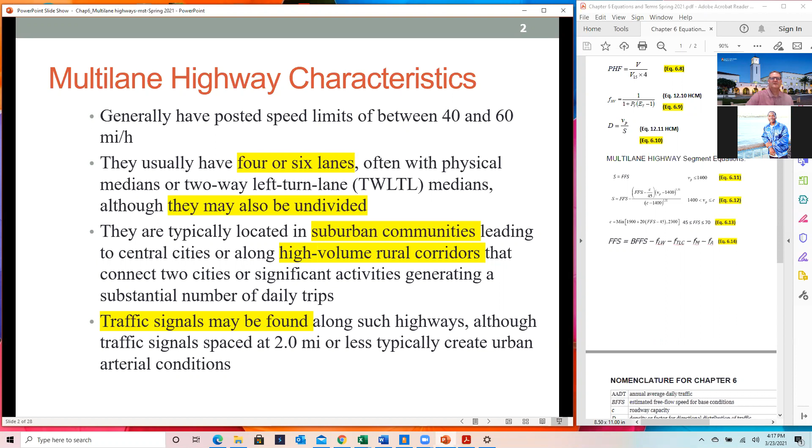Okay, what things make multi-lane highways different from freeways. First and foremost, vehicles enter and leave at intersections and driveways, and they can go through the median. You can't do any of that on a freeway - there's no intersections, there's no driveways. I mentioned that last week, that maybe the only kind of driveway you would have is to some sort of maintenance station or something. But multi-lane highways, definitely you can enter them from intersections and driveways, and you can go through the median at various points.

Traffic signals can be on the facility. Remember, on freeways, the signals are only at the ramps, where the ramps tie into the local road, but they're not out on the freeway itself. And the design standards of multi-lane highways tends to be lower than what you find on freeways. But as it says, the ideal multi-lane highway approaches freeway conditions as you have fewer access points and less turning and less friction, let's say, to the traffic flow.

The visual setting and developed frontage along multi-lane highways have more impact on drivers. Think about Friars Road, there's shopping centers right up against the road as you're going in and out. So there's a lot of what I call friction in the traffic. You've got to be very aware as a driver of all the interactions, vehicles coming and going, making turns, coming in and out of driveways. You don't have any of that on freeways. The only places you have that kind of friction on freeways is in those weaving areas we talked about last week.

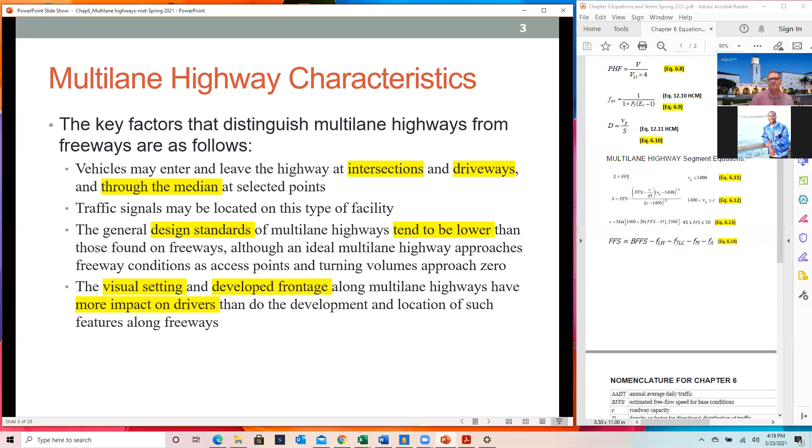Here's a few equations, and when you look at them they'll remind you a little bit of the equations we worked on for freeways. But the break point, that's the one thing in the freeway equations, there was a BP, the break point, and there was an equation for it. When it comes to multi-lane highways, the break point is singular, it's 1,400 passenger cars per hour per lane. So the break point is the same for all speeds on a multi-lane highway. For freeways, the break point was different for different speeds, and if you look closely at the figures you'll see the difference.

So there's still a capacity calculation, a C calculation, that's equation 6.13 for multi-lane highways, but there's no break point equation for multi-lane highways because the break point is 1,400 in all cases. You can see this equation looks similar to equation 6.2 for freeways. As a matter of fact, I've got 6.2 listed up here - you can see the freeway equation. It's similar, but it's got break point, BP, in the equation rather than, here it's 1,400. And the power that it's raised to is different than the power here.

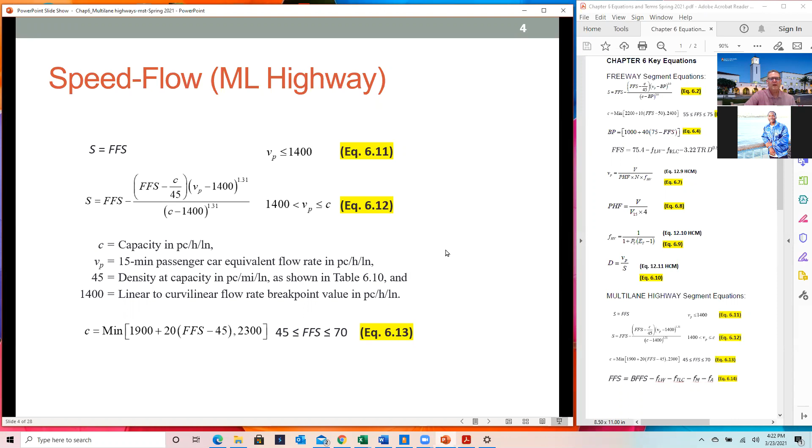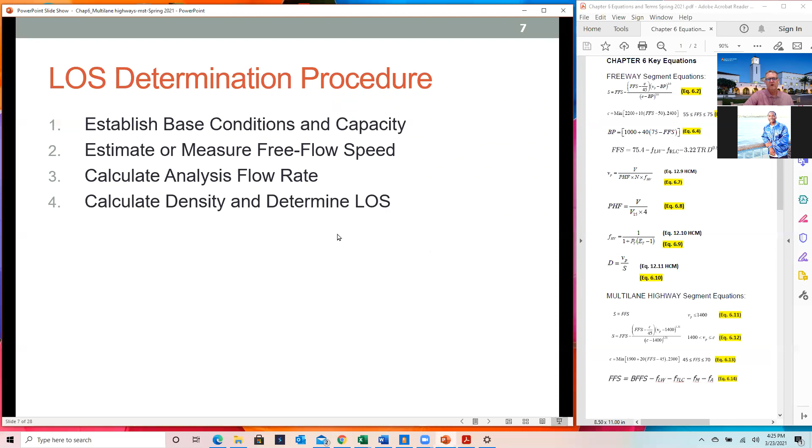So let's start getting into it. What are the base conditions for multi-lane highways? We went over the base conditions for freeways. The base conditions for multi-lane highways, again, are similar.

Lane widths are 12 feet, we talked about that before. 12 feet is what you find in most places. If you narrow the lanes, you're going to suffer the consequences of lesser capacity, because people don't like to drive in narrow lanes. You're all drivers, and maybe you've never really noticed whether driving in a narrow lane has an effect on you. It's probably even subconscious as a driver in many cases. It's not like you're driving along and all of a sudden think, wow, this lane's really narrow, I'm going to slow down. It's almost a subconscious reaction as a driver that if you're in a narrow lane, you're going to drive more cautiously.

Anyway, 12-foot lanes, then a minimum of 12 feet of total lateral clearance from roadside objects, right shoulder and median. This is a little different, a different measure than for the freeways. The freeway only mattered on the right lateral clearance, because freeways were always divided. But lateral clearance or shoulder median greater than 6 feet is considered in computations to be equal to 6 feet. You'll see this when we go over the factor used in calculating the free flow speed. These are all things that can have an impact on your free flow speed.

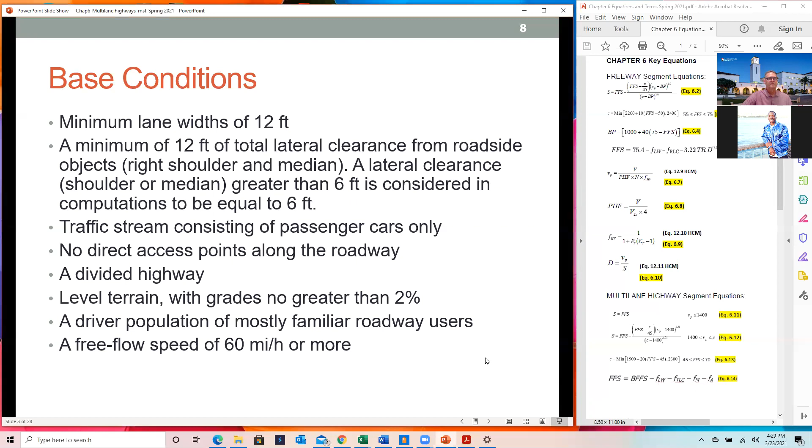So here's the equation, 6.14. And the one thing you can see is that this equation looks a little bit like equation 6.6 up here for freeways, but it's not exactly the same. There's one factor, the lane width factor, that's identical, but instead of 75.4, you use this BFFS. It's not, the BFFS doesn't stand for best friends forever, I don't think. It's basic freeway, basic free flow speed, or free flow speed for base conditions. So the equation's similar, but there are different factors to take into account.

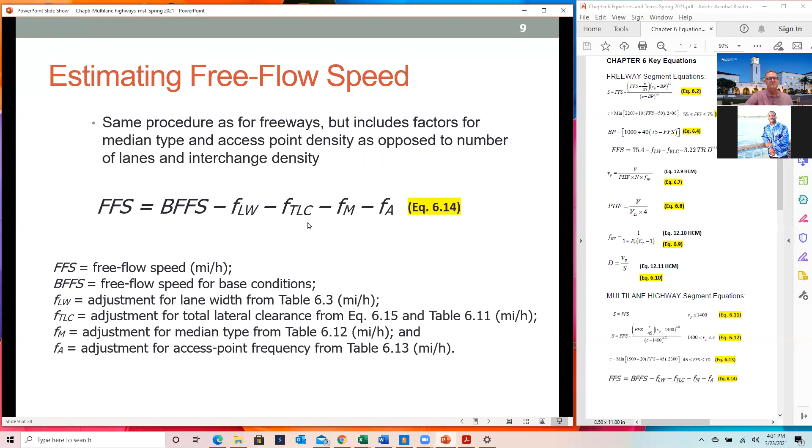So we'll talk a little bit about the free flow speed for base conditions to use in the calculation. Then the adjustment for lane width comes from table 6.3, which is back in the freeway portion of your chapter, because it's exactly the same. There's no change there. It's the same table, 6.3. But the adjustment for total lateral clearance is from equation 615 and table 611, and that's different, that's a different factor. You'll see that as we go through the example. Then there's an adjustment for median type from table 612, and an adjustment for access point frequency, which is table 613. So the equation's a little similar to equation 6.6 for freeways, but with different factors, and we'll go through how you apply them.

So the lateral clearance for multi-lane highways is table 611, and you use this equation 615, which basically says the total lateral clearance is the lateral clearance on the right and the lateral clearance on the left. The lateral clearance is the sum of the clearances of the median, if the median is greater than 6 feet, you use 6 feet, and the shoulder, if it's greater than 6 feet, you use 6 feet. Therefore, for the purposes of analysis, total lateral clearance cannot exceed 12 feet.

The issue is, if you have more than 6 feet on both sides, more than a total of 12 feet of lateral clearance on both sides of a multi-lane highway, look what that means. Whether it's a 4-lane or 6-lane highway, basically the factor is 0, there's no factor to worry about. But if you have less than 12 feet of total clearance, both to the median and to the right of the multi-lane highway, let's say you've only got 2 feet on each side, which is a total of 4 feet, then for a 4-lane highway your factor is 1.8, and for a 6-lane highway it's 1.7.

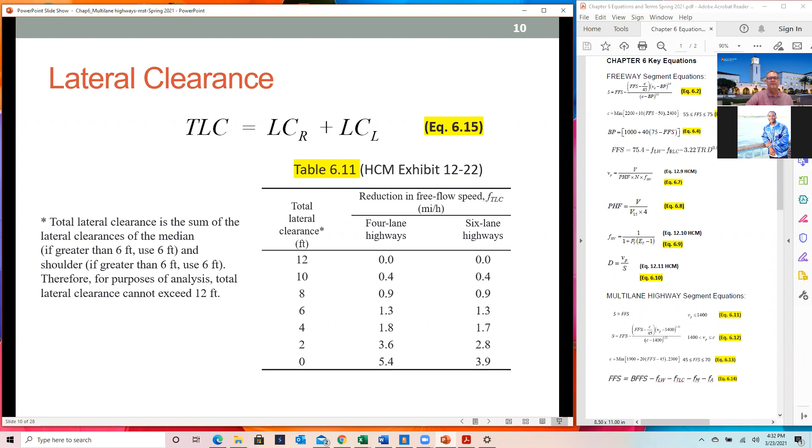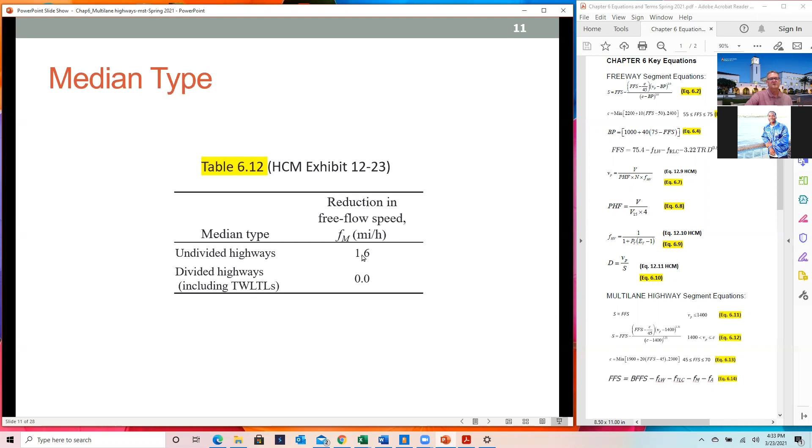Then there's the median type table, which is really simple. If your multi-lane highway is divided, your factor is 0, there's no factor at all. But if it's undivided, some multi-lane highways are only divided by, say, a double yellow line, and that's it, with 2 or 3 lanes in either direction on either side. If that's the case, then your reduction factor is 1.6.

Then you have access frequency, and what this means is how many access points per mile on the segment you're evaluating. This one can have a major impact on your reduction in free flow speed, to the extent that if there are over 40 access points, meaning driveways, left turn slots, openings, those kinds of things, that can reduce your free flow speed by 10 miles per hour, a pretty substantial reduction. This is why I use the term friction. All of these access points require vehicles to slow down, and in some cases even stop, to make a turn, or vehicles are jumping into the traffic flow without a big enough gap, so vehicles have to slow down to allow vehicles in from the driveways. So they can have a pretty substantial effect.

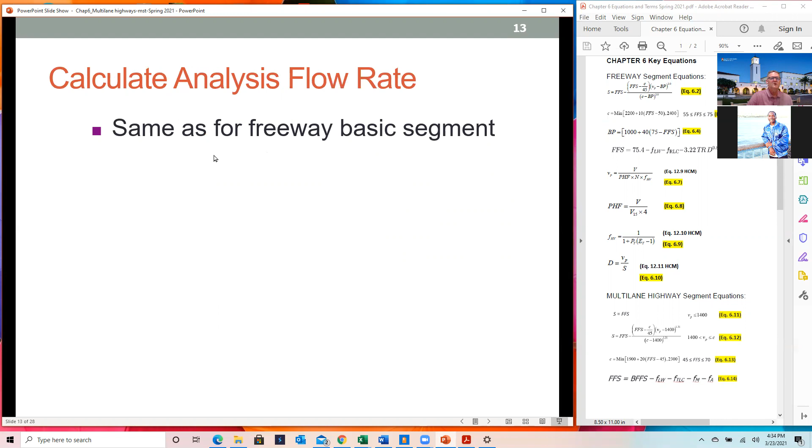So what you need to do now is calculate the analysis flow rate, which is the same as for the freeway segment. When you do the heavy vehicle adjustment, to calculate the analysis flow rate, you need to use the heavy vehicle factor. That's the analysis flow rate equation, which is equation 6.7, which I have up here.

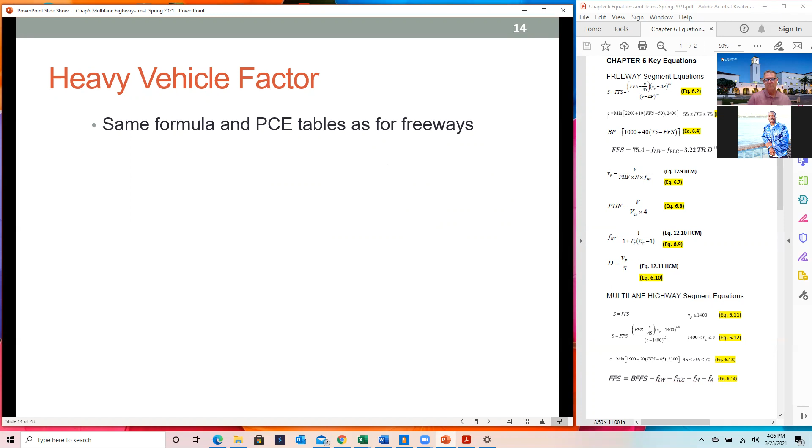Remember, you've got your volume, your peak hour factor, the number of lanes, and the heavy vehicle factor. The heavy vehicle factor is equation 6.9. You still use that for multi-lane highways, whether it's level or rolling terrain, or a specific grade. And for calculating density, equation 610 is still the same equation you use for multi-lane highways.

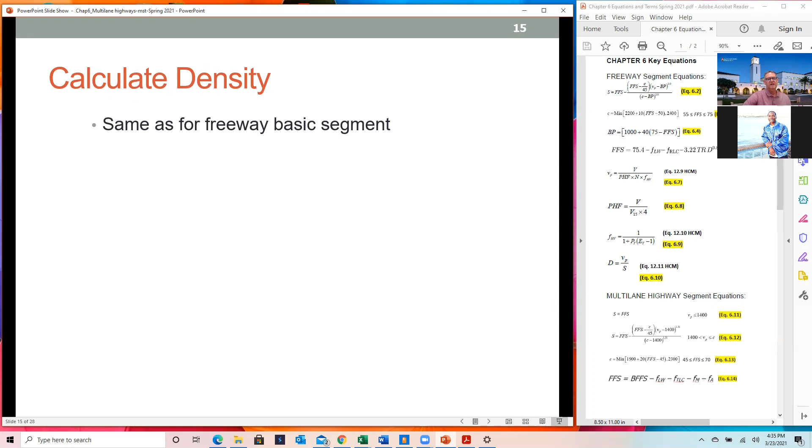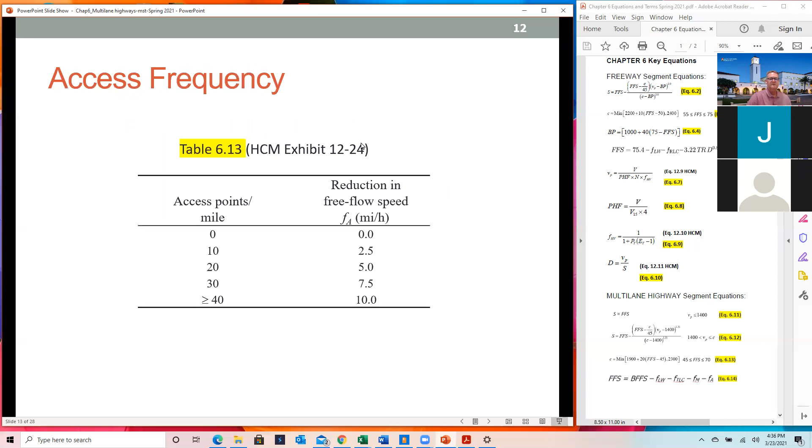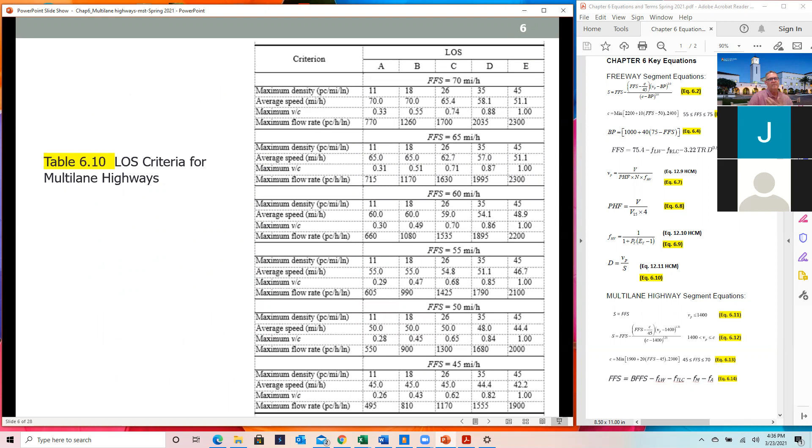Then you can determine the level of service either from table 610 or figure 6.4. Those are the ones I showed earlier. You can use those depending on the data you're given in the problem, to look up your level of service calculation.

Let me stop there for a second to see if anybody has any questions. There are some similarities between freeway segments and multi-lane, but there are some basic differences as well. We'll go over a few problems that will highlight those. Any questions at this point? Okay good, don't see anything in the chat.

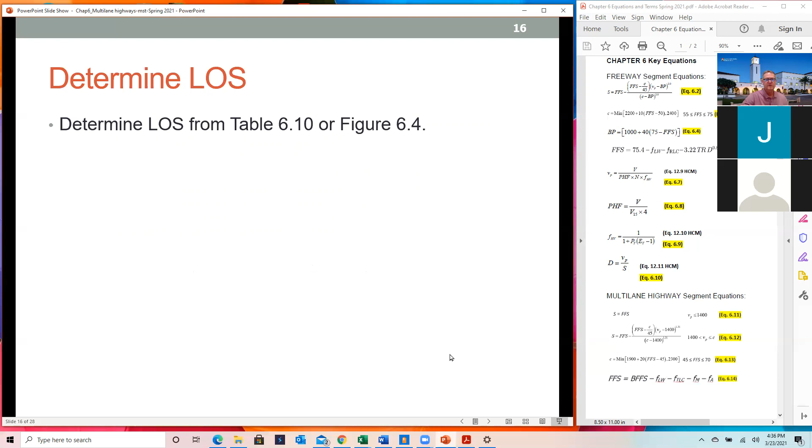I've got a few slides here I also want to go over. There's one problem in your homework where we get into these things. This is figure 6.15 from your book, which is interesting to look at. These are graphs showing percent of daily traffic against time of day. On top is an intra-city route, and on bottom is an inter-city route. The intra-city route is within a busy metropolitan area, and an intercity route is one of those rural corridors that connects two cities.

The typical weekday is the solid line, and a typical weekend day is the dashed line. Think about the freeways around San Diego, pre-COVID or as traffic is recovering now - this is pretty typical. There's a morning peak around 6 a.m., then it drops off. There's a much smaller peak around lunchtime, and then an evening peak. Generally, in San Diego and most metropolitan areas, the PM peak is a little higher than the morning peak - traffic's a bit worse in the evening. Then between 12 a.m. and 5 a.m. in the middle of the night, traffic's really low. You can see this is pretty typical of the way traffic works.

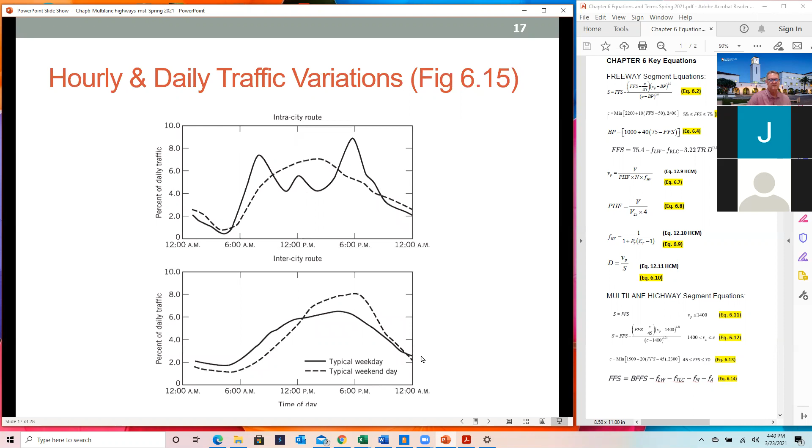There's also seasonal traffic variations. Now we've changed the parameters of the figure - here it's months of the year instead of hours of a single day. This shows the monthly average daily traffic as a percent of the annual average daily traffic. Basically, on a business route, traffic grows a bit in the summertime, a little higher than in, say, springtime. But for recreational access routes, traffic really grows in the summer months when more people are on vacation. Again, COVID changes all this, but this is typical.

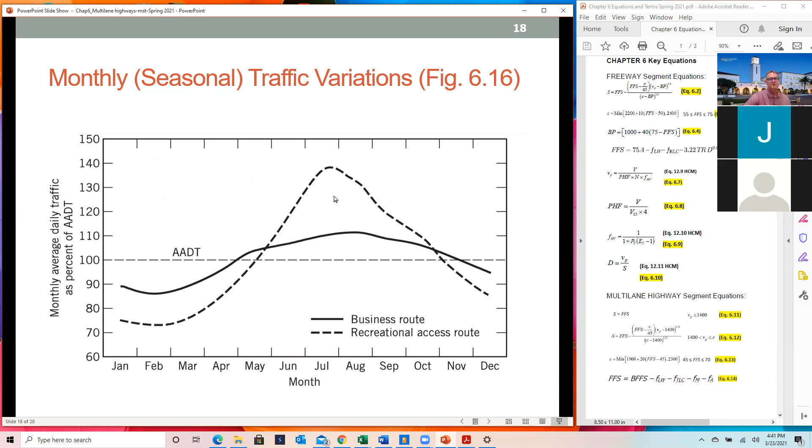There are situations that don't follow this pattern. A good example that would look very different, or at least have two peaks, would be a ski resort. You'd have a peak starting in late November and peaking through February and March. Then a lot of ski resorts attract people in the summertime as well, but they'd probably have their highest peaks in winter and maybe lower peaks in the summer. The point is that depending on the facilities you're looking at, you need to pay attention to seasonal traffic variations so you can plan for it.

I have one other slide that's useful, and it'll help with one of your homework problems. This slide shows the highest 100 hourly volumes in a year — it's figure 6.17 in your book. The problem in your book directs you to the wrong figure, and I corrected that in the homework assignment. Basically this shows the hourly volumes as a portion of the annual average daily traffic, and the number of hours annually with those volumes or greater.

Basically this says you probably don't want to plan for either a freeway or a highway segment to pass traffic with no congestion if that congestion only happens once or twice a year. Way back here, you'd have to plan for a much higher volume if that's your target, versus if it's going to happen 100 times a year — then you probably want to make sure you have at least that capacity.

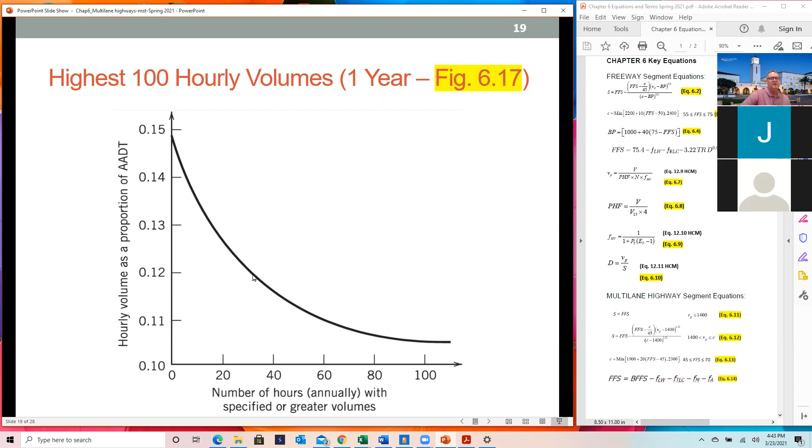As you'll see when you look at some of the other problems, it's very typical to plan for the level of volume at the 30 hours per year point. If there are 30 hours spread throughout the year when traffic is at that level, maybe that's what you ought to be planning for. That's kind of a rule of thumb.

That leads to a couple of equations: the K factor is the design hour volume divided by the annual average daily traffic. Then you can get the directional design hour volume, which equals K times the directional distribution factor. Some freeways are pretty much 50-50, where traffic going one direction comes back that same direction, so the amount in either direction is similar. But on some routes that's not the case, and the directional distribution factor might be more like 60-40 or 65-35.

So these are a couple of equations that you use on one of your homework problems.

Let me just check something real quick here. Just want to see if I've got this now. That's right, okay. All right, let me just hang on one second, guys. I want to pull something else up. Let me see if I can find it.

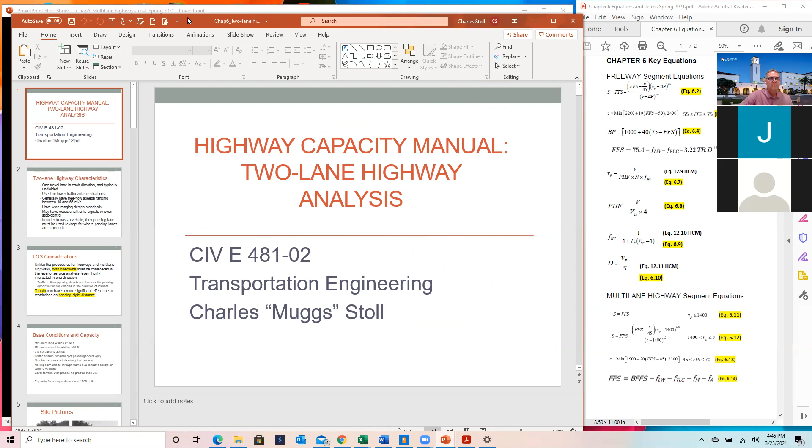Sorry, guys. Before I go over those problems on multi-lane highways, I want to spend a little time on two-lane highways — just the qualitative stuff, no equations or calculations, just generally so you have some familiarity with the capacity characteristics of a two-lane highway.

Two-lane highways have one travel lane in each direction, and they're most often undivided. They're used for lower traffic situations. Free flow speeds can range between 45 and 65 miles an hour, because a lot of these roads are in the backcountry where there's relatively little traffic, so vehicles can safely travel at higher speeds.

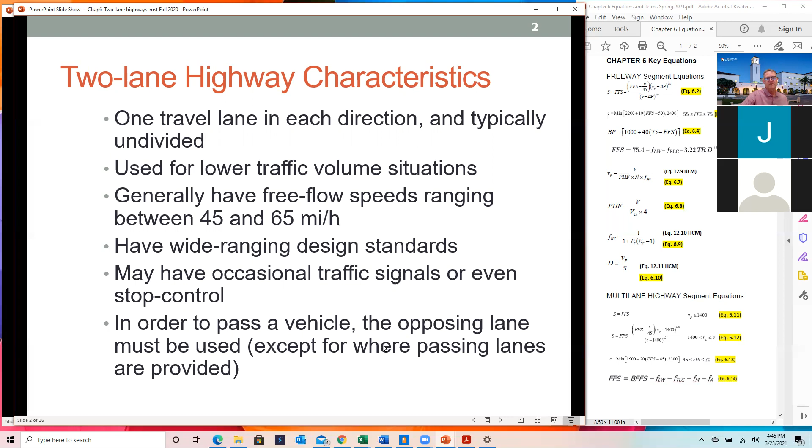They have very wide-ranging design standards, which are often controlled by the terrain as much as anything else. If you're back in rolling hills or mountainous country, it's sometimes really hard to put a long tangent section in because of the terrain you have to negotiate. They may have signals, some two-lane highways have stop signs, and you might even see roundabouts on these kinds of highways. To pass a vehicle, you have to use the opposing lane, unless there are passing lanes provided, which there are in some cases.

When you look at level of service, not that you're going to be doing any calculations, but I think it's important for you to know that if you're determining the level of service for a two-lane highway, you have to consider the volumes in both directions, not just one. For multi-lanes and freeways, we're looking at flow in one direction, but for two-lane highways you have to use both.

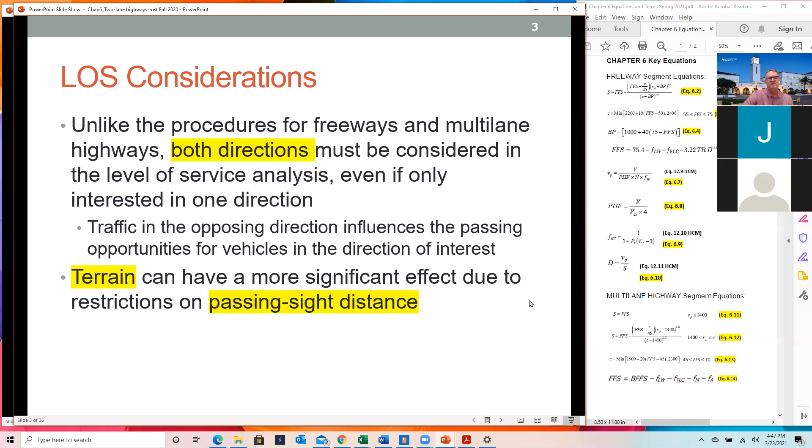Terrain can have a much higher impact on the level of service of two-lane highways because the terrain can have major restrictions on passing sight distance. And if your passing sight distance is restricted and passing opportunities are restricted, that definitely has an impact on level of service for two-lane highways.

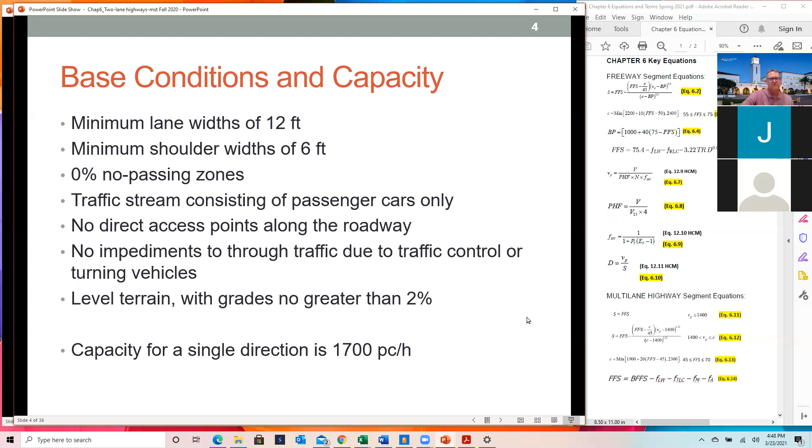Base conditions are still the same thing, 12-foot lanes, shoulder widths of 6 feet. A couple other things here: capacity for a single direction is about 1,700 passenger cars per hour, and this is nothing you have to remember. But I think it's just worth going through and looking at two-lane highways.

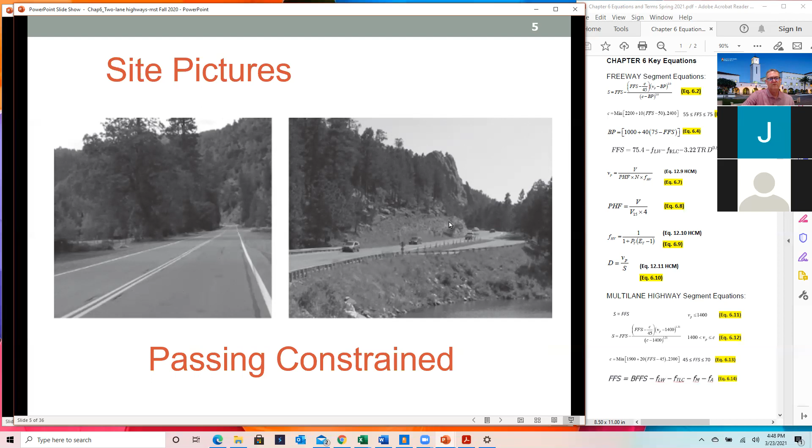The same sort of thing is happening here. You can see this road is in mountainous terrain. There's lots of curves, so it's going to be constrained for passing.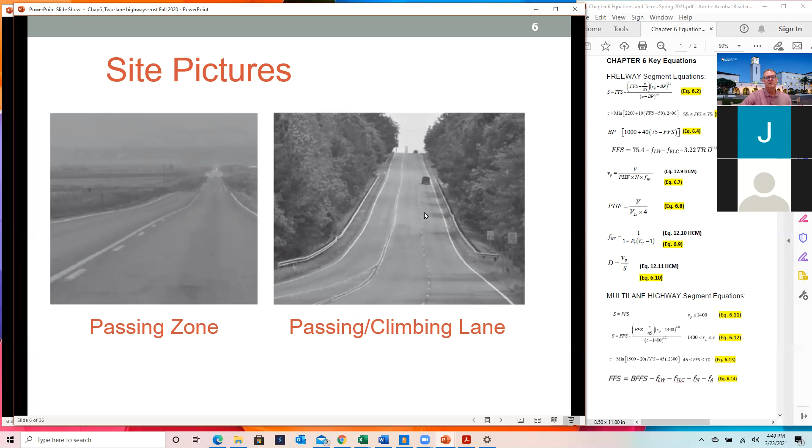And then on some two-lane highways, you'll find passing or climbing lanes like this one here, which aren't continuous lanes. They're there for relatively small stretches to allow people to pass slower-moving vehicles or trucks.

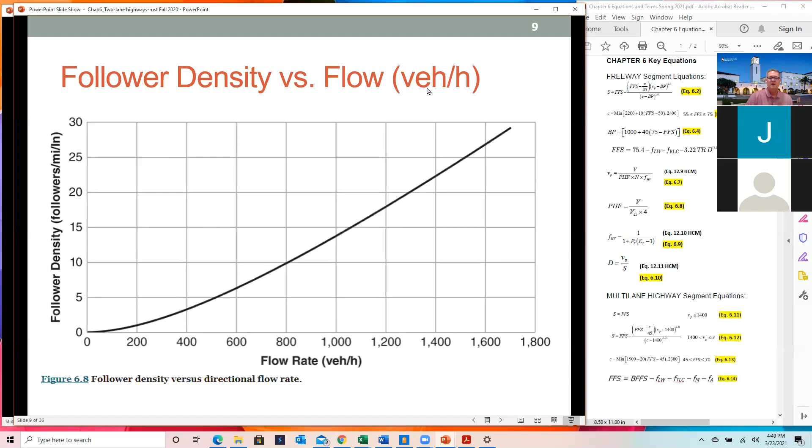So anyway, I think that's about all I wanted to cover. The only other thing I'd mention is that level of service on two-lane highways is really about passing opportunities. If there aren't very many passing opportunities, you're going to have a lot of followers.

They use this term 'followers' on a two-lane highway, meaning you've got a slow-moving vehicle and people start lining up. If you've ever driven on two-lane highways in the backcountry, you've probably experienced this, where there's a slow-moving vehicle, no passing opportunities, and the line of cars behind them just continues to grow, which can turn into an unsafe situation because people start making dangerous maneuvers to pass out of frustration being behind a slow vehicle.

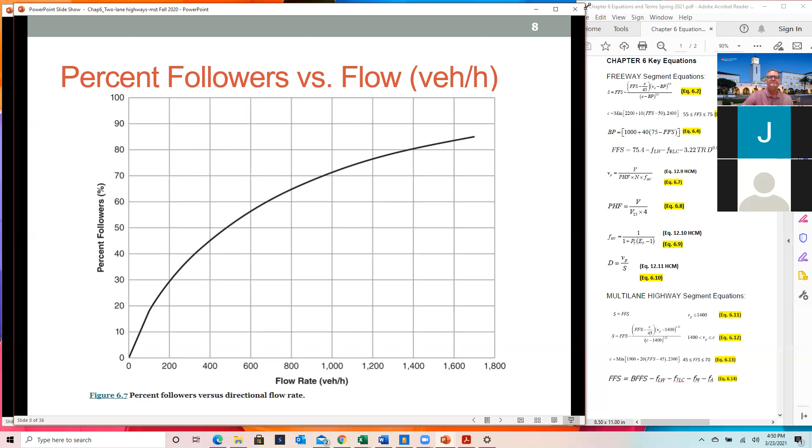So in that case, you have to provide maybe even a pullout and try to encourage slow vehicles to move over, that sort of thing. So that's about all I wanted to cover on

The two-lane section—I thought I had those slides in the same one here. That's why I had to switch it out there real quickly. I realized I didn't have the two-lane highway slides in this deck, so I had to switch it over.

Hopefully that was helpful. There won't be any problems on two-lane highways other than maybe a couple of true-false qualitative questions on the midterm, and in the review I'll highlight those if we go there. But there is a section in your book on two-lane highways, and if any of you end up working in transportation for agencies that have rural areas within them, it's an area you may want to take a look at in the future if you end up working on two-lane highways at all.

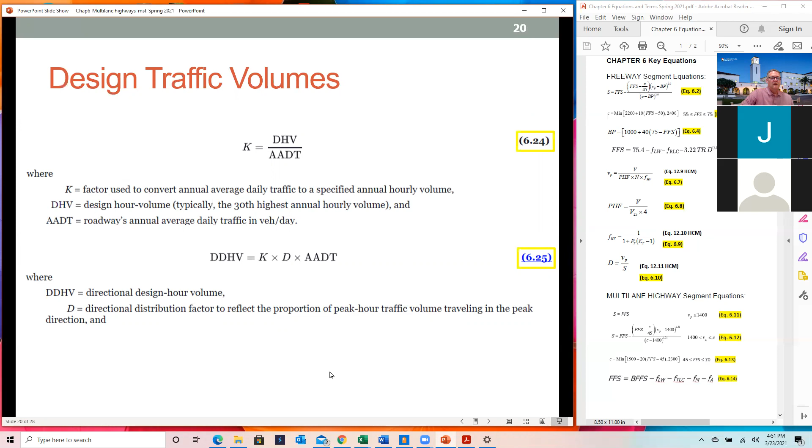All right, so let's move on to some problems. Any questions before I get going on the problems for the multi-lane highways?

So the first problem I want to go over is example 6.3 in your book. It's basically just calculating the free flow speed for a multi-lane highway. If you read the problem: 4-lane undivided highway, that's important, 2 lanes in each direction, 11-foot lanes, that's important, 4-foot shoulders on the right side, there are 7 access points per mile, and the posted speed limit is 50 miles per hour. What is the estimated free flow speed?

So basically we're using equation 6.14, this equation down here.

Here's one thing I didn't highlight on the slides, but it's mentioned in your book, and you need to be aware of this: they tell you the posted speed limit is 50 miles per hour, but it's stated in your book that the free flow speed for base conditions is generally 5 miles an hour over the posted speed limit. So the BFFS you would use in this equation is 55 miles per hour, not the 50 posted speed limit. That's specifically described in your book. I probably should have highlighted it in the slides, but this example makes it very clear.

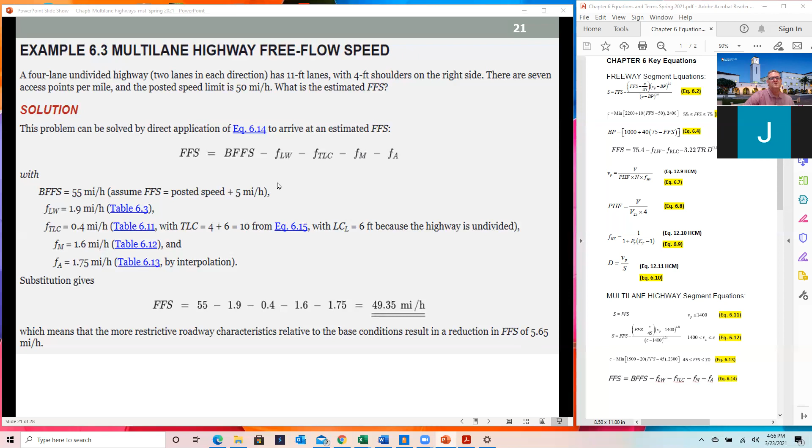So that's example 6.3. Now example 6.4 is a little more involved - you go beyond just calculating the free flow speed. I actually have this on 2 slides. So you have a 6-lane divided highway, 3 lanes in each direction, on rolling terrain with 2 access points per mile, 10-foot lanes with a 5-foot shoulder on the right side and a 3-foot shoulder on the left side. You're already figuring certain things out here - you don't have to go into tables with specific grades because they tell you it's rolling terrain. It's 2 access points per mile, so you've got that. It's 10-foot lanes, so you've got that. And it's a 5-foot shoulder on the right, 3-foot shoulder on the left, so that's a total of 8.

So TLC is 8. The peak hour factor is 0.85, and the directional peak hour volume is 3,400 vehicles per hour. There are 7% single unit trucks and 3% tractor trailer trucks in the traffic stream. No speed studies are available, but the posted speed limit is 55 miles per hour.

So the first thing you got to do is free flow speed. You want to calculate it using that same equation 6.14. You have everything you need. The BFFS is 55 plus 5, which is 60. The lane width, because they are 10-foot lanes, the adjustment is 6.6 from table 6.3.

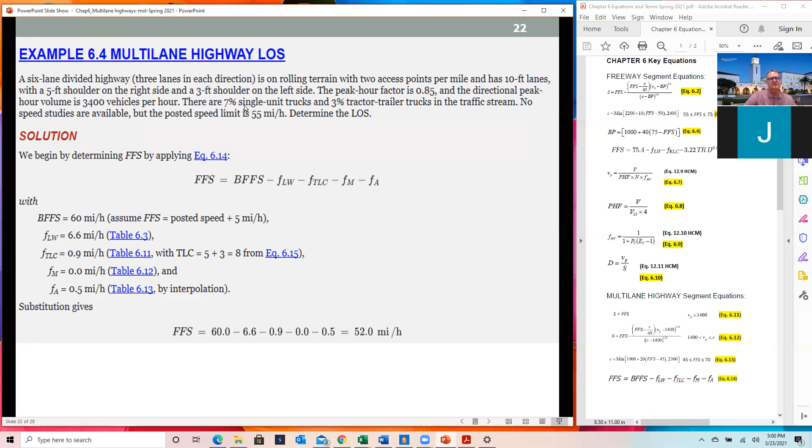So you put all of that in, and they also gave you one thing they don't show, they just kind of put it in here - the percentage of trucks, right? Because in the problem they said there was 7% single unit trucks, 3% tractor trailer trucks. A little deceiving there because that makes you think you have to use those grade charts, but you don't. This is more just for the percent of trucks, that's where you get the 10% here. So you calculate your heavy vehicle factor, put all of that in there, and you end up with an analysis flow rate, or V sub P, of roughly 1601 passenger cars per hour per lane.

So now you do need to check - this analysis flow rate, 1600, is greater than the break point, which for multi-lane highways is 1400. So it is greater. So the S that you use, the speed in your density calculation, is not going to be equal to the free flow speed calculated earlier. It's going to be modified based on equation 6.12.

So in order to do equation 6.12, you have to use equation 6.13 to calculate the capacity. You have everything you need in that equation to be able to do that. The only thing you really need to add to the equation is the free flow speed, which you already calculated at 52. We calculated it right here at 52. So you put that into the equation, you end up with the capacity, or C, equal to 2340.

So then you go back to equation 6.12, and you substitute everything in. You've got the free flow speed, you've got the capacity, you've got the analysis flow rate. So you substitute all of those values into the equation, and you end up with a speed of 50.5 miles per hour. So if you used the free flow speed, which was 52, the calculation wouldn't be correct.

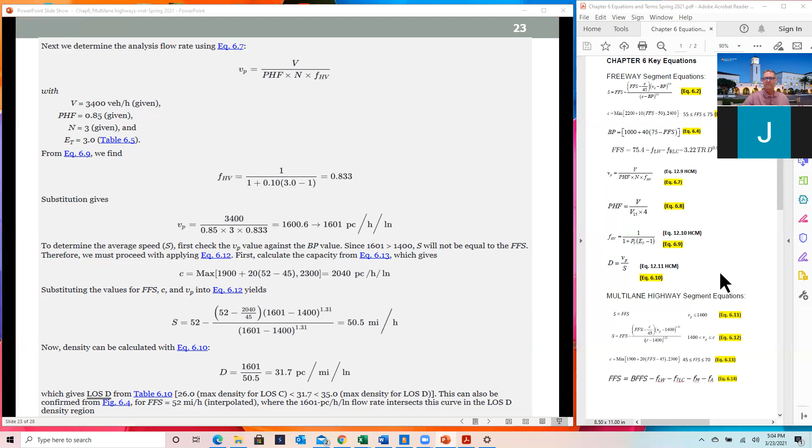Okay, I've got one more problem that I thought I would go over, which is a practice problem, practice problem 6.3. This is a problem where you calculate the level of service, but you need to deal with a specific grade, as opposed to rolling or level terrain. So it's just got one more level of complexity. This is the one where you fill in the boxes in the practice problems in your book.

So what we have here is an undivided multi-lane highway segment. It's undivided, that's important. Two 11-foot lanes in one direction, no shoulders, and a 55-mile-an-hour speed limit. That's important, and the fact that there's no shoulders is important as well. This highway segment has 40 access points on a 1.25-mile,

2.5% upgrade. So lots of access points and a substantial grade that it's dealing with. During the highest 15 minutes of traffic flow within the peak hour, there are 755 vehicles, and 12% of these are heavy vehicles with a 70-30 mix of single unit and tractor trailer trucks. So what are the estimated speed, density, and level of service of the upgrade?

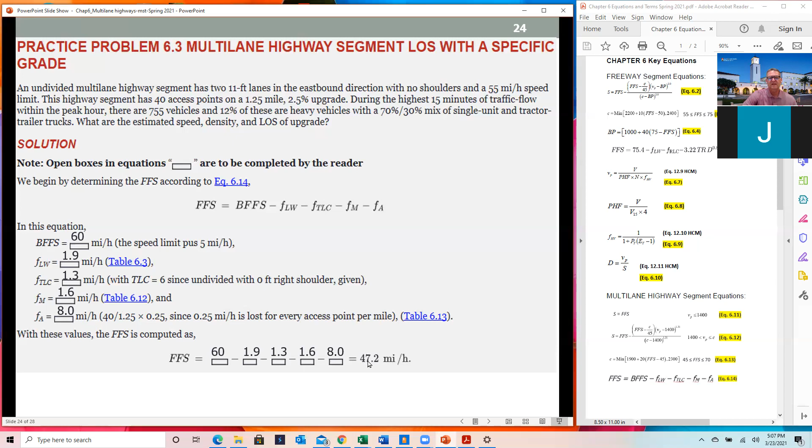So remember, here's the speed limit, 55 miles per hour, so the base condition free flow speed is 60, but because of all these restrictions, look at where that gets you, particularly these access points, as I mentioned before. These access points can have major impacts on your free flow speed. So the free flow speed in this section is actually under 50 miles an hour, it's 47.2 miles per hour. So that's the first part.

Now you need to determine the analysis flow rate, but that's going to be a little bit more complicated because you've got a specific grade. It says the length of the freeway segment is on an upgrade of 1.25 miles at 2.5%. So it's a grade that's less than or equal to 3% that extends for more than 1 mile, so you can't use the extended segment analysis.

So then you end up using table 6.8, because that's the one where you've got the 70% single unit and 30% tractor trailer trucks with 12% heavy vehicles for a length of 1.25. If you do all that, you end up with the ET factor of 2.6 at a 2.5% grade with 10% heavy vehicles, and 2.35 at a 2.5% grade with 15% heavy vehicles, so you have to interpolate that.

And when you do that, you end up with a total of... you end up with a 2.5, somehow I missed the value that it equals to, but it's basically 2.50.

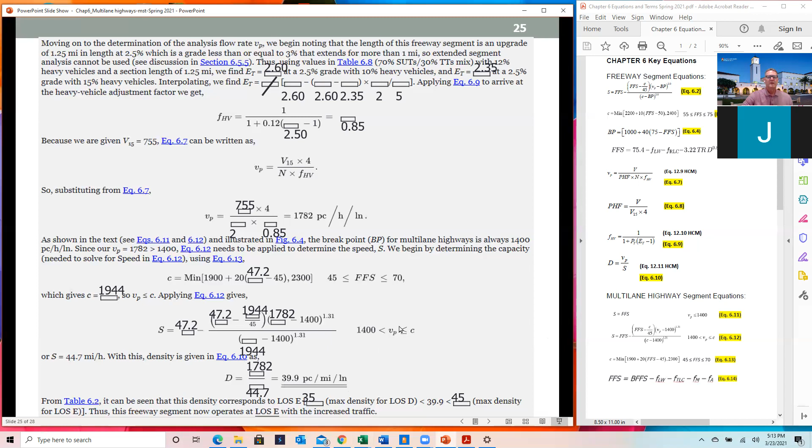So this roadway segment is operating at a much lower level of service than some of the other ones we analyzed. So I think with these problems here, let me go ahead and stop sharing. I think with these problems and the ones we did last Thursday, you have everything you need certainly to go through and solve the two problems for your group assignment, which is due by Friday.